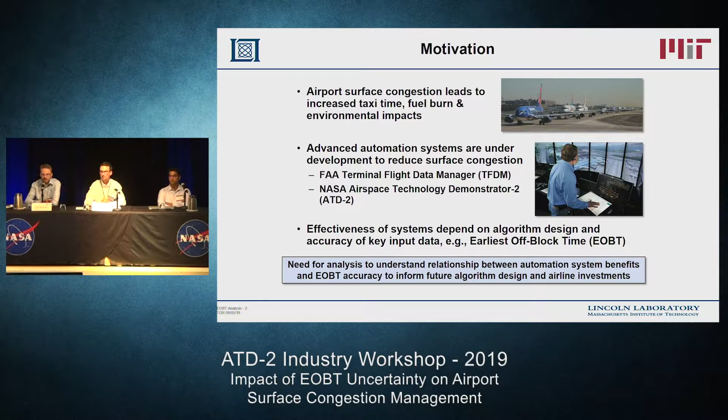There was a need for analysis to help us figure out the shape of that curve relating EOBT accuracy to the amount of benefits I would get as an airline, which I could monetize and then calculate my return on investment on. And this also helps the algorithm designers figure out how good the data is that they're going to be getting into their algorithm. So those were the two primary motivations for the analysis that we've done and are presenting the results of here.

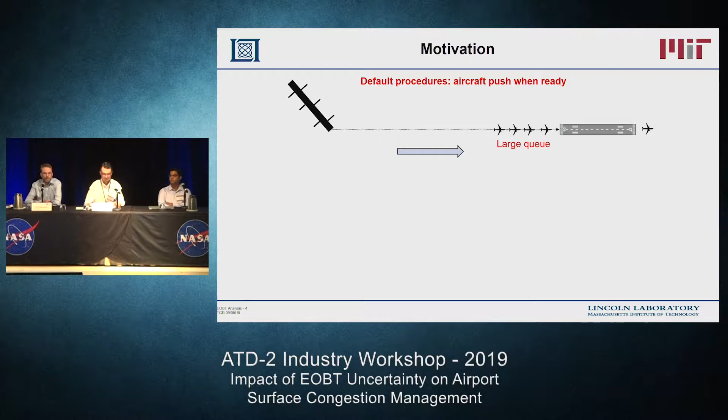So just a quick set of cartoons just to baseline everybody. So in a pre-surface congestion management world where the aircraft push when they're ready, clearly that can lead to large queues at the departure end of the runways, particularly when a lot of flights want to push back in a short period of time.

And so with congestion management, where aircraft are publishing their earliest off-block time, so here in this cartoon we have these 5 aircraft publishing when they're going to be ready to push back. We have some generic congestion management algorithm that's taking all kinds of inputs. That congestion management algorithm is going to vary as a function of the airport, the configuration that that specific airport is in at any given time, how well we know the taxi out times, etc. And that bottom one is obviously the one we're focusing on here, is the earliest off-block time.

And then that algorithm can then calculate the target off-block times, or TOBTs, which are then the control point that the ramp controllers are using to determine when to release aircraft. And so then the idea is that those aircraft can be released in a controlled way onto the airport surface at a time that the airport can actually accommodate them efficiently. And then the excess portion of the queue at the top is being moved back to the gate with engines off, and that's where the benefits are occurring.

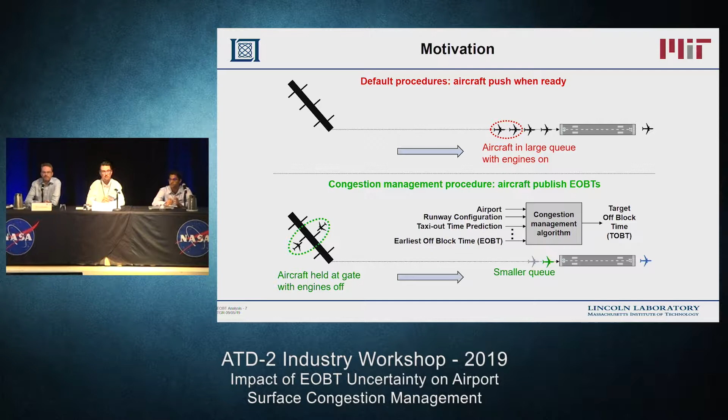Then we'll talk about the analysis that we've done on what the empirical accuracy of EOBT data is at a number of airports, Charlotte as well as DFW and Newark. And then finally, we'll get to what Al described as the money slide, which is where we're going to present curves that directly relate the benefits you get from surface congestion management as a function of the EOBT accuracy.

So I'm going to start off with just a little bit of background on the queuing model, focusing on Charlotte for obvious reasons. And the reason why we want a simulation system like this is so that we can do different variants of the operation at that airport, for example, with and without surface congestion management, so that we can directly compare taxi out times and through that calculate things like fuel burn, so that we can do comparisons between different situations.

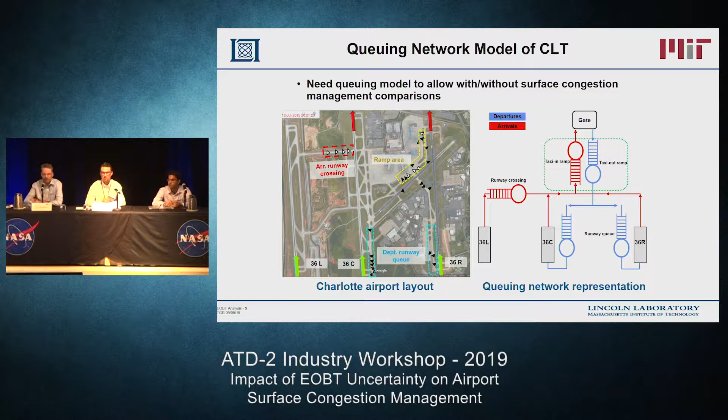And then the other primary queues on the Charlotte surface are the departure queues, in this case at 36 Center and 36 Right, and then the runway crossing queue for the arrivals coming in on 36 Left and crossing 36 Center. And so this is an example of a queuing network that we developed for Charlotte, in this case obviously in North Flow. We have similar models for the other dominant configurations as well. And then that's the basis of the analysis for Charlotte that we're going to be talking about moving forward.

There are obviously cases where the match is less good, and we always have to be cognizant of the fact that a simplified queuing model is never going to be able to capture all of the dynamics of the airport surface completely. But then what we really want to do is to get it good enough that it can provide us with realistic comparisons between different situations without being too complex. And so there's often a judgment call in there as to how much time and effort to invest in the simulation system.

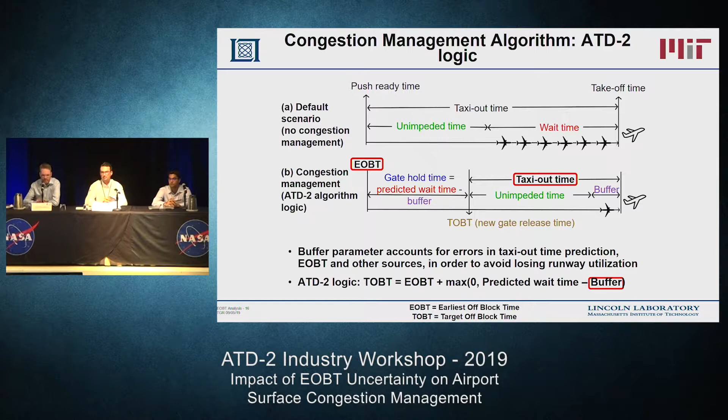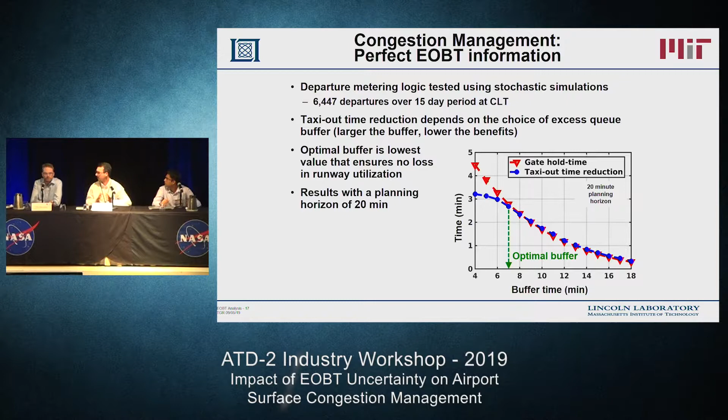Yeah, the slides that will be up on the website will have, in the interest of not having death by PowerPoint on the final day, I trimmed down the slides a little bit, but the full deck does have those time of day comparisons for total taxi time.

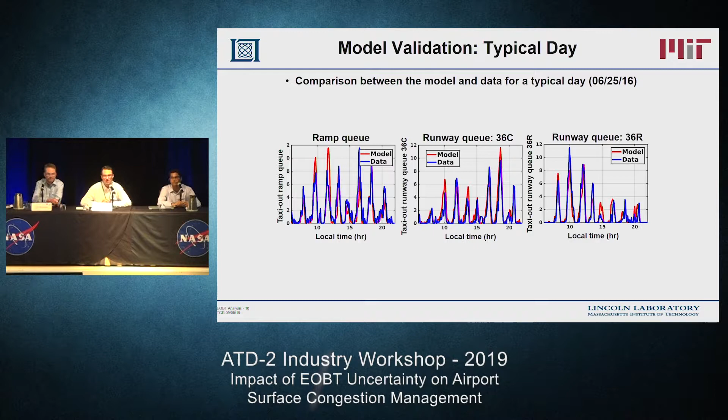Okay, so the next section is looking at the EOBT uncertainty that we actually observed in the data at these airports. And again, I want to caveat this with the fact that this analysis was done about 1.5 years ago, so it would be interesting to reassess these results with more recent data. And I know, talking to Jeremy, that the strategies that they used in the operational tests of ATD-2 at Charlotte use different variants of the data that we're going to be talking about, so we can expand on that in the Q&A if that's of interest.

So what we're going to be showing here is empirical data for Charlotte. This is for about a 2-month period from the end of 2017 into the middle of February 2018, for a major airline at Charlotte. And so what we did is we took the TFMS EOBT information that we got off the TFMS feed, and we calculated in post-process, as a function of the look-ahead time, what the error was of the EOBT at different look-ahead times relative to the AOBT as reported in ASPM.

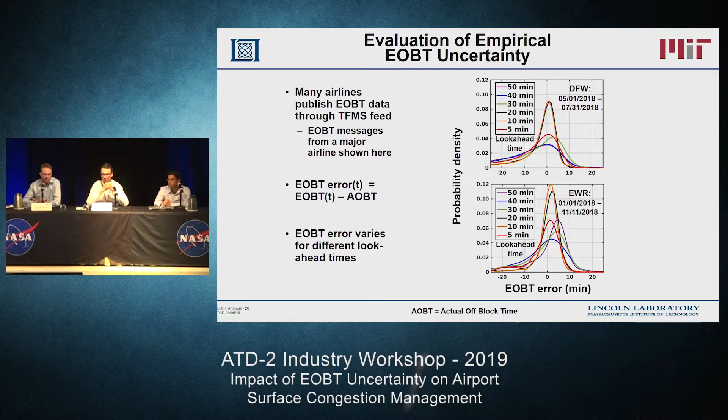But these curves look different for different airports and potentially for different airlines as well, depending on the algorithms that they're using to calculate the EOBT. And so I just alluded to the fact that we did this for the other airports as well, so DFW and Newark. I'm not going to focus too much on the dynamics here, but in general, the same general trend holds, which is that at shorter look-ahead times, the EOBT error is significantly lower.

And in the next plot, we summarize in an aggregate sense what the standard deviation of those profiles looks like for the 3 different airports. And so you see, within 20 minutes, there's a pretty stable standard deviation profile. At much longer look-ahead times, we see a breakpoint, at least in the data we looked at over these time periods for the different airports.

And it would be interesting to discuss why the 20-minute look-ahead time we think is a breakpoint. But I think, as you're planning what the look-ahead time is for the different congestion management algorithms, you have to factor in how good is this data that you're going to have access to.

So before we move on from EOBTs, we had a question that I just wanted to take advantage of while we're still here. So the question is, are you using only EOBT, or are you including LGTD, or the airline's latest gate time of departure, to increase the data set? So we were just using whatever the published EOBT parameter was on the TFMS feed.

It's our hypothesis that at different look-ahead times, the published EOBT is actually some of these different parameters, whether it's the LGTD or the P time. And I think different airlines maybe use different strategies. And so we didn't explicitly look at those other parameters, but we think that the EOBT field on TFMS is being populated with some of those other parameters when an explicit EOBT is not being calculated. But anything, Sandeep, you want to add to that? Yeah, that's it, nothing more.

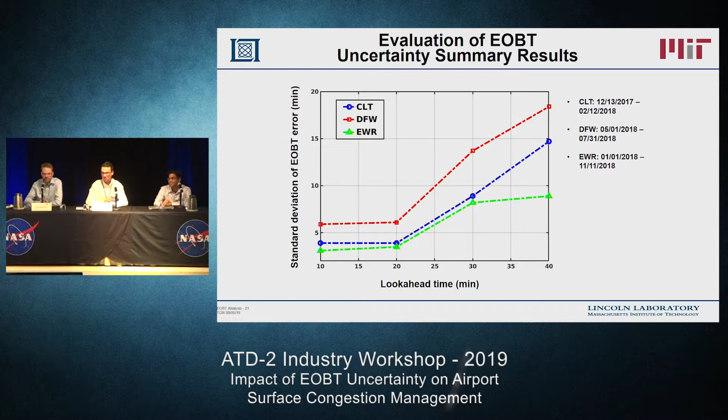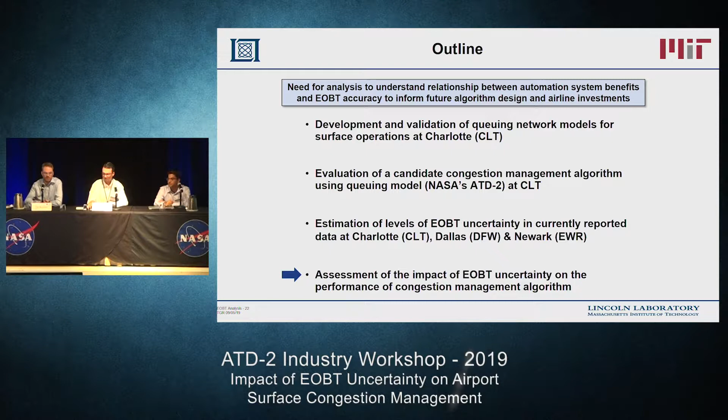So having got a sense, at least in that time in history, of how accurate the EOBT data was at that time, what we can now do is combine all the models and the analysis that we've done to now calculate for the different airports what the effect of different levels of uncertainty are moving forward.

So clearly the EOBT uncertainty impacts the congestion management, because it reduces the accuracy of the taxi out time prediction, and also affects whether you're conforming to the target push time. And so the bigger the uncertainty in the EOBT, as we've alluded to, the bigger the buffer time you need

to add. So this plot at the bottom left here shows the relationship from the different airports of the optimal buffer time that you need in order to capture that uncertainty as a function of the EOBT error.

And then finally on the bottom right, we're now getting very close to the ultimate plot that we're interested in. This is relating the taxi out time reductions, really the benefit that you're getting from surface congestion management, to the uncertainty in the EOBT. So as that uncertainty goes up, you see a decline in the taxi out time reduction, as we alluded to before.

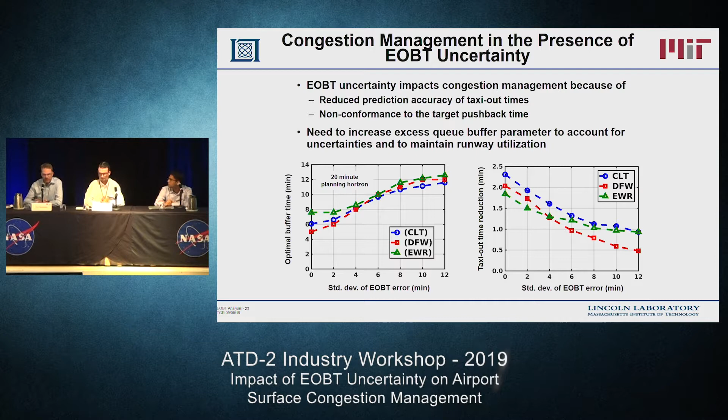And so in these plots, unlike one we showed a few slides ago where we had perfect EOBT information, we're now accounting for both the uncertainty in the taxi out time and the EOBT at the different airports. And the shapes of the curves for the different airports are slightly different because, as Sandeep alluded to, the topologies are different, the congestion levels are different, and so we wouldn't necessarily expect these curves to all be identical, and we see that the shape of the curves does vary for different airports.

And so now finally, the y-axis, instead of being taxi out time reduction, is now fuel burn saving. So ultimately what we want to know is what are the monetized benefits of different levels of EOBT accuracy. And so for the taxi out time reductions that we showed on the previous slide, we're now considering the fleet mixes at all of these airports. We know what the fuel burn rates are during taxi for all of the aircraft types that make up that fleet mix at the airports.

And we're calculating how much fuel burn is being saved for a given taxi out time reduction at each of these airports. And so we see the shapes here are slightly different again than the previous plot because the fleet mixes of the different airports are slightly different, and so the translation between taxi out time and fuel burn is slightly different.

So here what we've done is we've basically converted the taxi out time savings into an annual fuel burn saving. So we've scaled up the taxi time savings from the previous plot to account for what it would be over an entire year at the different airports. And this is in millions of kilograms, and it's then relatively easy. You take your favorite fuel burn number, $3 per gallon or whatever the right number is for the analysis. We could easily convert this into actual dollars.

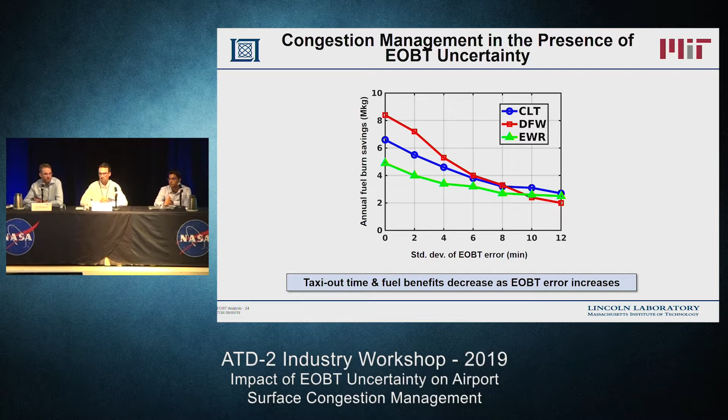If I wanted to improve the accuracy by a factor of 2, so instead of having a 4-minute standard deviation, I had a 2-minute standard deviation, and that cost me X million dollars, with curves like this I can now go in and say, well, how much saving in fuel am I getting for that investment? So I can do a return on investment calculation.

Okay, so in summary, I think this audience knows that the automation systems are going to enable significant fuel and emissions reduction. So it's great to see these systems getting rolled out through TFDM across the NAS. The analysis we presented is explicitly allowing us to look at what the relationship is between the benefits that we get from the system and the input data, especially EOBT accuracy.

And moving forward, I think it would be instructive to look at how these curves relate to a broader range of airports. In this study, we've only looked at the 3 we've talked about. But also, what does the cost curve look like from an airline perspective? How much money would it cost to reduce my EOBT uncertainty by, say, a factor of 2? Are we talking that there's a 6-month return on investment, or is there a 10-year return on investment for that kind of improvement?

And I think these are the kind of questions that we need answers to in order to figure out what level of EOBT can we expect over the next 10, 15 years. And then it also potentially motivates us to develop more sophisticated algorithms that can explicitly handle uncertainty in the input as well as other factors that we haven't even thought of yet. So hopefully that's given you a sense of the analysis that we've done and how it can contribute to both future ATD-2 and also TFDM moving forward, and be happy to take any other questions.

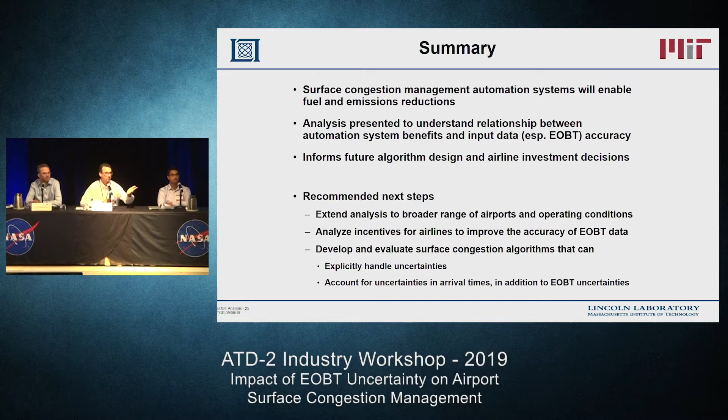Yeah, so as we mentioned, we found out about this early on through ATD-2, where we had the pleasure of going to Charlotte and looking out the window with timestamps and recording when the actual aircraft started to move, and then correlating that to the ASPM data. And so very high tech, exactly what you'd expect from NASA, I'm sure. So that was the last question that we had online. So we'd now like to open it up to the room. Mike?

Yeah, so the question was, there's a journal paper that's in press, it's been accepted. So we're at the vagaries of the publication schedule of the journal, but I think it's going to be imminent, right, Sandy? Transportation Science, yeah. It's going to come up in Transportation Science. It's an INFORMS journal. But as soon as that's published, we'd be happy to share it with anybody who would like it. That gives a slightly more detailed explanation of what we did, and also expanded on the analysis in terms of breaking the data down by anonymized airlines, right, Sandy? We don't identify the airlines, and it also actually monetizes the results directly.

A couple questions. First, how do you decide which runway queue the particular aircraft would go in the schedule? And second question, would you say this is an upper bound in that there is a variability in the unimpeded taxi out time as well? Your pushback times vary, spot handoff times vary, general speeds of taxiing vary. So you're assuming that's all perfect, a single number, if the focus here is just on EOBT. So just curious about your thoughts.